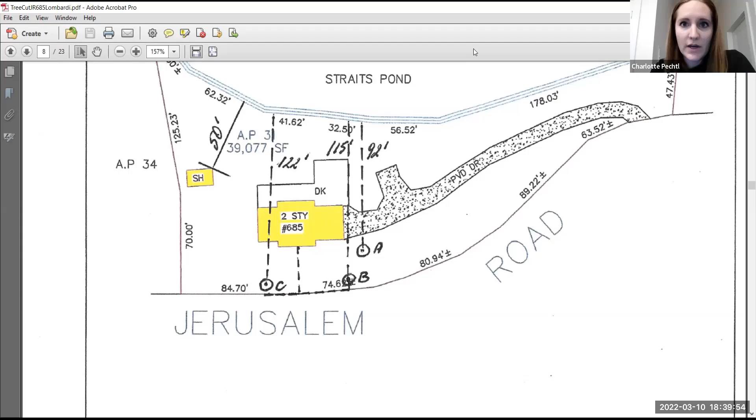I'll add that I did talk to Fabrizio about submitting this RDA because when I was called to the site for fallen tree reports, we talked to National Grid, and they said that normally they would just cut the branches, but since these trees were dead, they cut it down below the power line.

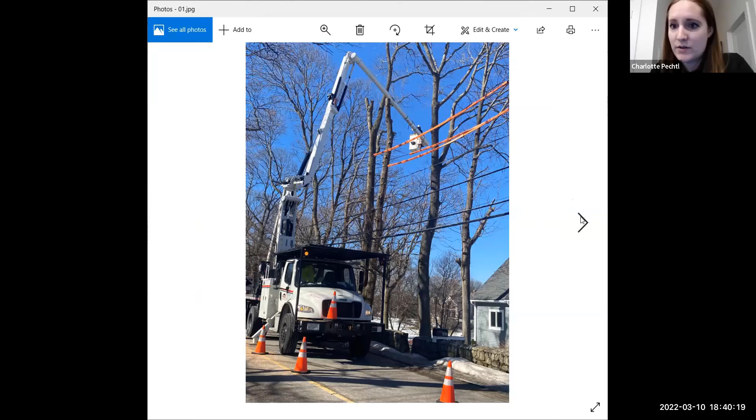Then it's the property owner's responsibility to remove the rest. This was when we were at the scene. You can see the trees have been cut below the power line, and this is B and C that were shown on the plan. Over here you can see A, which is closest to the house, 92 feet away, with close proximity to the roof.

Mr. Chairman, can I make a comment? Yes, please. I've looked at this application. Two of the three trees mentioned here, one is 115 feet, the other is 122 feet - that's out of our jurisdiction. The one tree I do see here is 92 feet, that's obviously dead, and I think we should approve this application.

Thank you. Any other comments? Am I allowed to second Jay's motion?

Jay Pamparo will make a motion to issue a negative two determination on the RDA at 685... Jay, can I ask you to hold on one second? So Alex Berg from 45 Windy Hill, I don't know - that's an application in front of us later this evening. No, I'm just making sure that Nikki, who put that in the chat box, wasn't looking at anything on this application. That's fine, sorry Jay, go ahead.

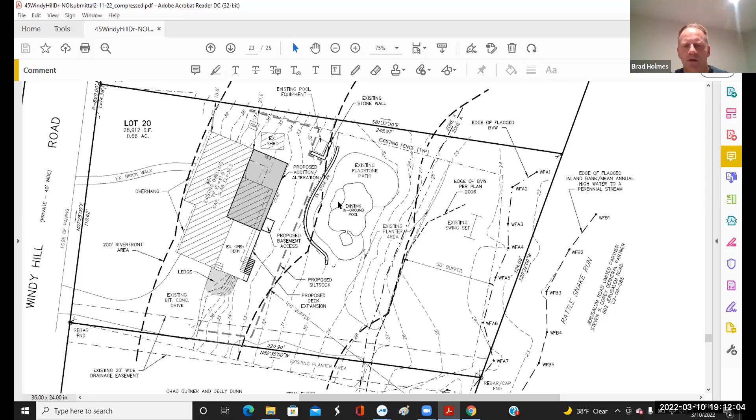In order to comply with the riverfront regulations and also enhance the buffer zone and bordering vegetative wetland, we're proposing mitigation plantings within the eastern portion of the site. And pull that up on the next image.

So that would be the yellow portion of the project is the new footprint proposed at the rear of the house, and the shaded area here towards the wetland and in the buffer zone is the mitigation and enhancement proposal to add native saplings and shrubs within the rear portion of the site.

We've crafted the project to comply with the buffer zone regulations from the town of Cohasset - sorry, didn't mean Hingham - so that we avoid any work within the 50-foot buffer zone, and we're also in compliance with the riverfront redevelopment standards.

We feel that this project is somewhat minimal in the sense that we're occupying an existing area of lawn and existing deck and redeveloping the site, but also enhancing the site greatly with the overage of enhancement plantings within that eastern portion of the site that abuts Rattle Snake Run. So I think I'll take any questions you may have and leave that introduction as is.

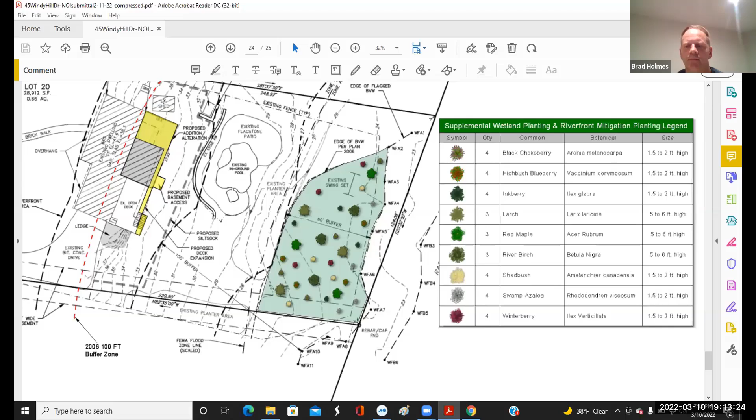Charlotte, have you been out to the site? I have, yes. Could you pull up some photographs? Brad, could you tell us the condition of that 50-foot buffer right now? Sure. I did want to say that I got a chance to coordinate with Charlotte back and forth, and I appreciate Charlotte's help. I wanted to thank Charlotte for a great job.

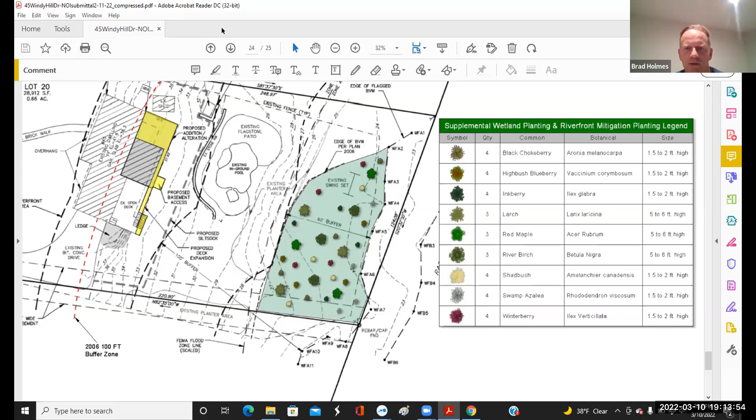Thanks, Brad. Can I share my screen for a sec? Yes. Would you like me to just stop sharing? Yes, please. Can I ask a couple of quick questions in the meantime here, Mr. Holmes?

Correct me if I'm wrong, but the only work that's being done in the 50-foot buffer is the mitigation planting. Is that correct? That's correct. And then is there any work actually being proposed in the 100-foot buffer zone? The 100-foot buffer zone would be the proposed addition, depending on what the wetland determination would be.

It did just look like the edge of it was out of the 100 on the last plan - it looked like everything was out of the 100. Correct. So my next question was, is there no work in the 50, no structural work in the 100? You're really just focusing this on the 200-foot riverfront area? Correct. And in compliance with the riverfront regulations, also adding to this area with supplemental plantings native to increase the buffer zone and wetland in this area.

Okay, perfect. Thank you. Brad, could you tell us what's under the snow right here? That's basically somewhat of a mulch and herbaceous layer. It's not a lawn area per se, but it's more of a wood-chipped, low growing herbaceous area. You can see some of the ground cover kind of popping up through the snow. There's a mix of existing native plantings and landscape plantings in that area, and what we're proposing to do is add to that. Okay.

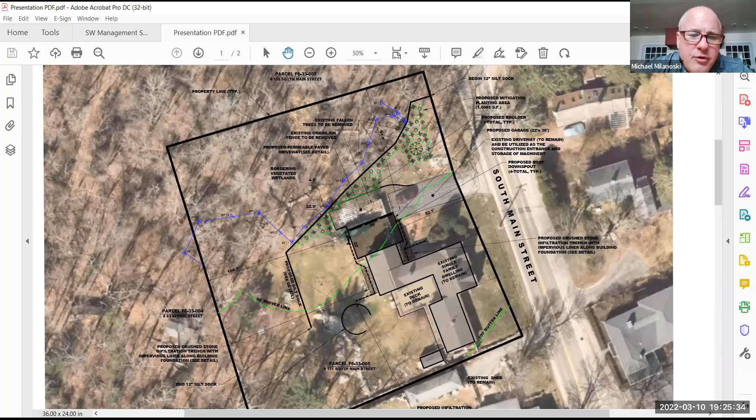David, can you go to the other aerial where it shows where the boats are all located, or zoom in there? That's hard to see, isn't it? In the NOI you actually have some better pictures that show the area where the proposed driveway extension will be, and what the outside storage currently is for the boats, which will no longer be possible with this addition should the commission choose to approve it.

Again, what we're asking for is the Concom to approve us locating this addition. It will be within 50 feet of the BVW, so it will require a variance.

As part of the due diligence with this, I did have a pre-consultation meeting with Charlotte, actually met several times. I originally came to her, which is shown in your NOI on the last page, with the initial proposal, which was to build a 36 by 36 square foot building that would have utilized the existing driveway and allowed 2 cars to pull straight in, so I would have 4 cars parked within the building. The challenge with that is, as with this whole project, that was, I believe, within 8 feet of the BVW - obviously well within the 50 feet.

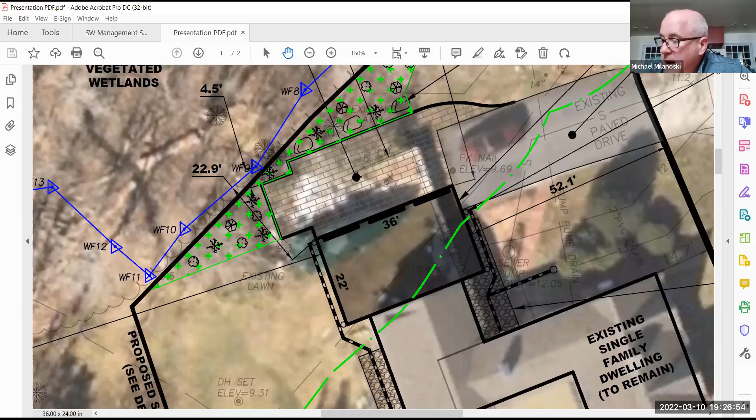Through conversations with Charlotte, we went back and tried to rotate the building and make it a little bit smaller, which you have here. In order to do that, instead of the cars entering directly in the driveway straight into the garage, they would have to go on this driveway extension and then turn into the garage, which then extends the pervious driveway that we're proposing. Again, that was part of the pre-consulting work that we did with Charlotte - she was very helpful with that. This is a smaller building than what was originally proposed.

I think after looking at this design and working it out with the 36 by 22 option, we can actually work either way, whether we use a smaller building and rotate back to avoid some of this additional driveway extension so it goes right into the garage, or this version.

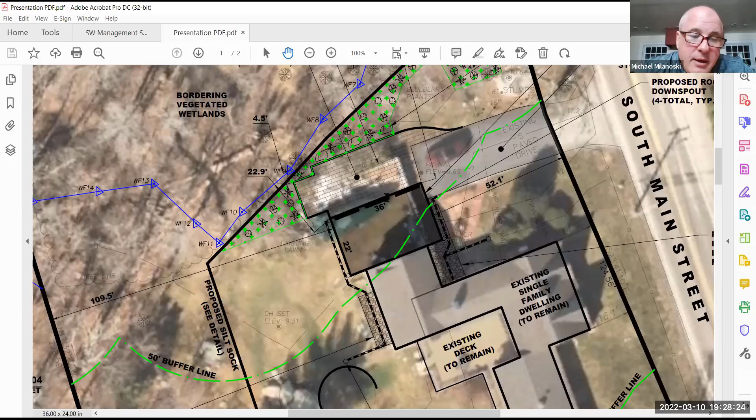I'm really open either way, whichever the Conservation Commission wants to go. So with that, I'll turn it over to David Newhall of Crocker Design Group. He'll go over the technical part and the extensive mitigation we've proposed, as discussed in our pre-consultation meeting, because this will require a variance should the commission approve this. We've provided for some extensive additional mitigation.

Thanks, Michael. I think you did a good job covering the existing conditions, the more technical side of it. For construction access, we're going to use the existing paved driveway to come in. Any stored machinery overnight would be stored either in the driveway or outside the 50-foot buffer.

Down gradient from all the proposed permeable paver driveway and garage addition will have a continuous silt sock to prevent any erosion from going into the existing bordering vegetated wetlands.

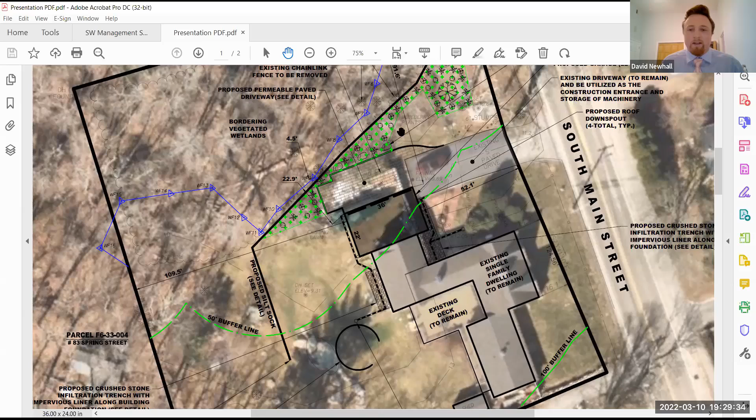The proposed mitigation plantings are all from the approved planting list within your bylaw. These are planted at a 2-to-1 ratio from the proposed garage, which is 792 square feet, and we have 1,600 square feet of plantings that extend to really help bolster this buffer area up along South Main Street where this wetland extends.

We also have a permeable paver driveway that will infiltrate all stormwater runoff that goes onto this driveway, and 2 stone infiltration trenches that will take all the roof runoff and infiltrate it into the ground. So both the peak runoff rate and the total volume going toward the wetland today in this area will be reduced.

All stockpiled materials will be held outside the 50-foot buffer with a continuous silt sock around to, again, prevent any erosion or sediment from running off into the bordering vegetated wetland. With that, I'd like to open it up to any questions you might have.

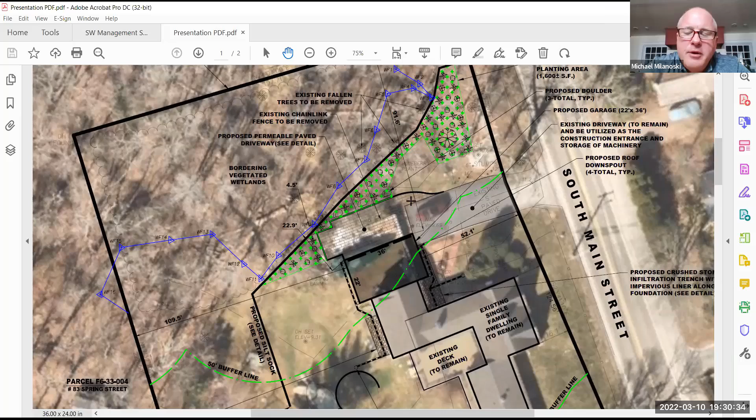David, could you show the original we came in with and the alternative, just to put everything in perspective, what we started with and where we ended up. As I said before, I'm comfortable rotating this back if that's the direction the commission would like to go, given some of the driveway issues we had to address to make the turning radius to get into the garage in that location.

Just give me one second as I pull that up. There we go. This is the alternative addition that Michael was talking about, showing the 36 by 36 garage.

What I've found in relooking at this is that the 36 depth could be reduced. You still need the width to fit 3 cars in, but the depth could be reduced, which could push this maybe 18 to 20 feet away from the BVW versus the 10.7 feet that was there. I only bring that up to show we're flexible on which way to go.

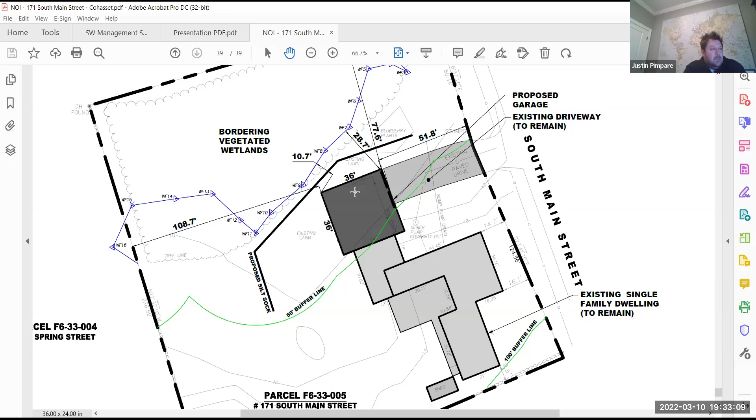My question is, first off, Mr. Milanoski, sorry to hear about the health problems within your family. So the plan we're looking at now, this 36 by 36, which plan are we working off? There was a much smaller plan there, the 36 by 22. I just want to know which plan is the revision, which plan are we working off of? The one in the NOI, this one.

Okay, can we just—and again, I apologize, not trying to confuse anybody. I was just trying to show that we can rotate that addition either way with a smaller piece, not the 36 by 36.

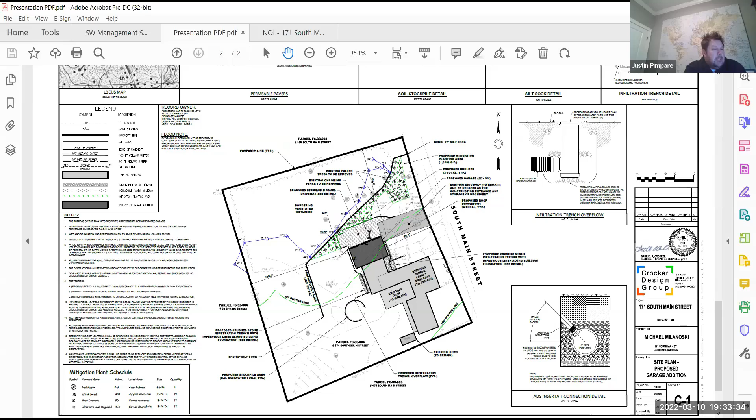I think you realize the big obstacle you have here is working in the 50-foot buffer zone, which has traditionally been considered a no-disturbance zone. I don't want to design the project for you, but it looks like the garage is 52 feet from the edge of the road, so it's further back than that from the road itself. Has there been any consideration to moving the garage closer to the road, which would take a good portion of it out of the 50-foot buffer zone?

If it moved closer, I think then I'd lose the ability of connecting it to the house, and how you would be able to go from one section to the other. In order to get into the garage, the door is in the middle of the existing house, so it would have to connect at that particular point.

To your point, could it be rotated 90 degrees and set so the back of it is over to that side I was just mentioning? Right to the left a little bit. We could probably have the back right there and then go forward, which at that point could get you about a 20-foot distance from the BVW.

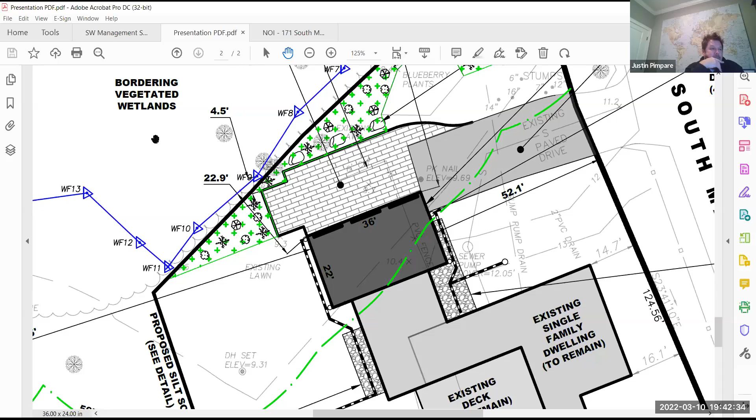The question I had is, are there any trees being removed as a result of this? I see some stumps at the edge of the driveway, but are any trees removed for the addition or the pavers? We do have some trees that have been knocked down, at 45 and 50-degree angles shown out there, but nothing of any size. There are some arborvitaes right where some of the pavers would go, but nothing beyond that.

So those 3 trees proposed to be removed, are those in the 50-foot buffer? Those are actually in the BVW. Charlotte, do you have a picture of those? I do, yes. I can share my screen if you want to stop sharing for a second. Okay, thank you.

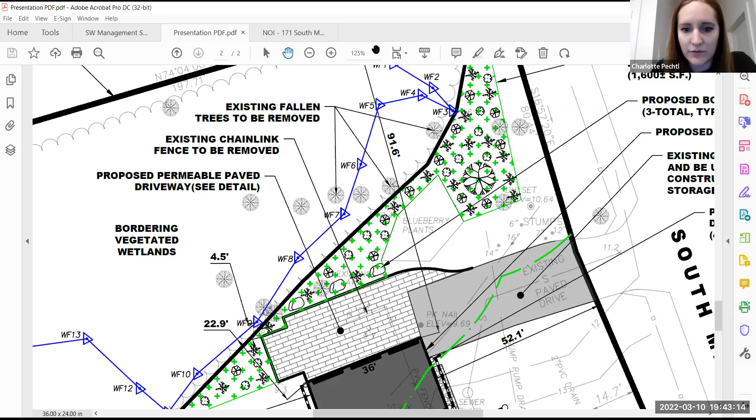Yeah, these are all widowmakers. Sorry, give me one second. They got knocked over - I want to say whenever we had that big storm, they got knocked over. I guess that was early November.

So is there any reason they need to be removed? Could you leave them there? I'm not comfortable with that - habitat, I mean, they're pretty, but when that falls, that's just dangerous. I'd probably ask you, Mr. Milanoski, if you take it down, just to leave it there, not move it, and not use it for firewood. That's fine, let it rot. Good for the wildlife. Yeah, I have no problem with that. That's what I was getting at. Thank you, Eric. You're welcome.

Charlotte, do you have some other pictures you can show us of the site? I know you took about 30 of them out there. I do, yes, sorry, let me zoom out here. I'm going to go back to the beginning. So this is the existing driveway - it has a gate at the edge of where the impervious ends. Then this is the side of the house with the entrance, and this bump out here is where the proposed addition would go.

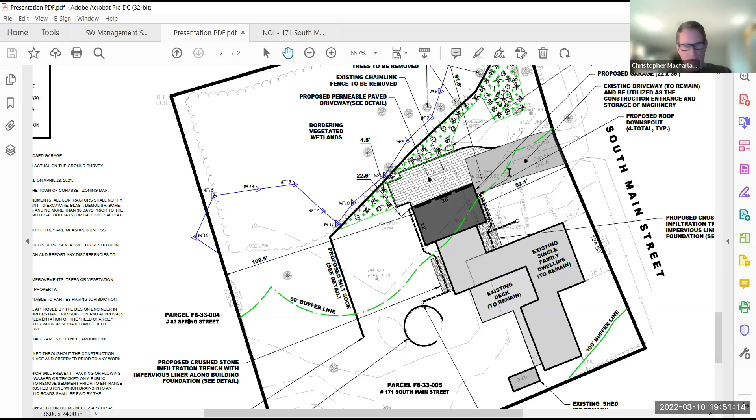The next hearing this evening is continued from February 24th. It is NOI 22-07 and Stormwater Permit 22-03 at 205 Atlantic Avenue for new construction.

Good evening, this is Andrew Flynn, the property owner. I just want to say thank you very much to all the commissioners for your time a couple weeks ago, and thank you to the commissioners for participating in the site visit last Friday. Thanks to Charlotte and certain commissioners who followed up with the Wilkinson design team, our ecological design team on the project. Pleased to have on the meeting tonight the team from Wilkinson Ecological Design, Gregory Lombardi Landscape Design, as well as our architect, and Deb Keller from Merrill Engineering. Thank you for the time a couple weeks ago and over the past couple weeks, and we're pleased to be here this evening to continue the discussion.

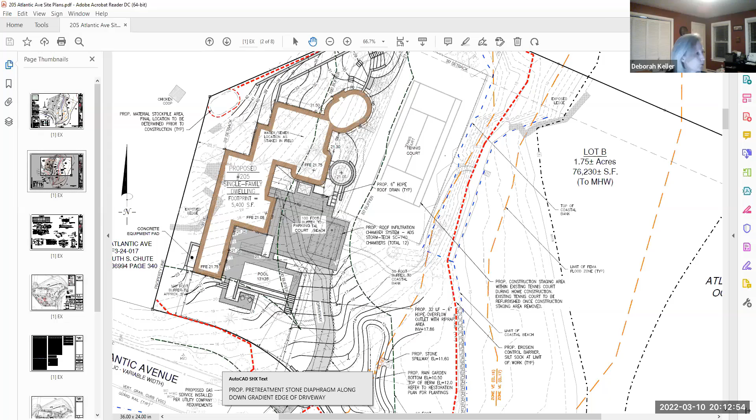Is that rain garden being built on fill, or has it been elevated? So it's actually slightly excavated into grade, with a small fill just to create that low berm on the backside. Have you done a test pit there, or any test pits in that area?

Unfortunately, the weather hasn't allowed us to yet, but we are scheduling that to get some confirmation test pits out on site.

So I recall when we were walking on the beach that we saw areas of exposed bedrock, not very far from there, and it led me to wonder how much soil cover there actually is. It's not actually even soil, it's sediment, and it's fairly coarse. So anything that goes into that rain garden, unless it's properly constructed with some fabric and an appropriate fill material with a good load of carbon material for decomposition, you may have a problem there.

So I'd sure like to see a test pit done. Probably two of them, one at that southern lobe and one at the northern lobe, to get some notion of what that subsurface looks like.

And I know you're supposed to be 2 feet above groundwater, but if in fact you are only 2 feet above bedrock, that's another story altogether, because then there's no place for it to infiltrate. It's going to go right on top of that bedrock and ride the surface of that bedrock right on down to the beach. So I think you guys need to investigate that a little further.

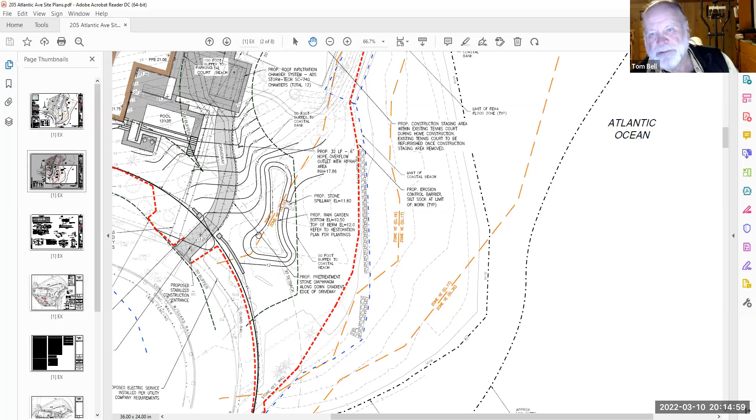You may find that you have to move that rain garden someplace else. I shouldn't say that—let's get some data first. Absolutely, and see where we're at after that.

And to Tom's comment about the test pits, that was another question I had. I certainly would like to see the test pit under the proposed infiltration chamber that's right there in the middle of the driveway. I know that clearly, we typically require test pits at the home as well.

Given that you're going to be excavating 20 feet of fill over there, I think you're going to get your money's worth of excavation out of there. But typically, we'd like to see it at the home as well.

Something that popped in my head that I wanted to mention too, that we had spoken about with regard to construction and erosion control on the site. We show sort of the lower limit in the red dashed line here. We will be adding, as mentioned at the previous hearing, an additional row of erosion control, sort of following the demarcation between the single family home work and the restoration work as we move forward.

So I wanted to let you all know that we will be adding that to the plan. I would propose that you put it right on the 50-foot buffer just outside of the tennis court area.

I'd like to see photos of when you've got your test pit excavated—photos of the profile. I'm a licensed soil evaluator as well, so I'll probably be the one that goes out there, just so you know that we're not just digging a hole and filling it in.

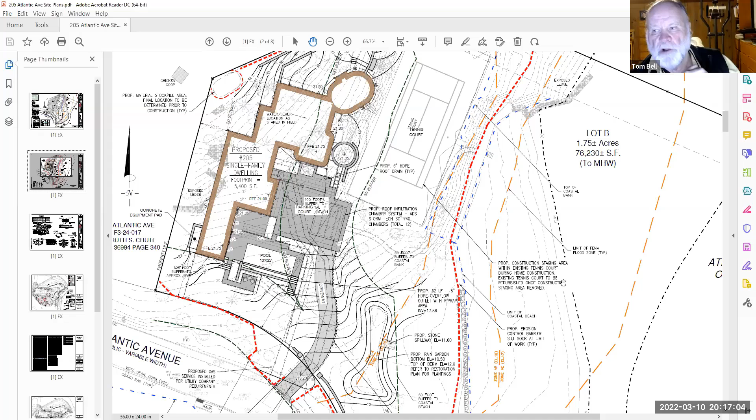And I would also hope that you would leave it open for at least 24 hours, if not 48 or 36, to get an accurate estimate of the water level and not just depend on modeling. I'd like to see how that fills up.

I will double check—that's almost a liability issue to leave it open, but I'll see what we could do there. Maybe we can cover it so that it's not a safety issue. So I think you can probably put a temporary fence around it.

A lot of excavators won't do that. Put some plywood over it, or a steel plate, something else. So I'll check into that to see if we can do something to that effect.

Has there been a plan submitted that shows the different drainage areas on this site, pre and post? I do have one in the stormwater report.

It wasn't in the actual plan set that I have attached here. Let me see if I can. But you do have one in the documents. Pre and post? Pre and post, yes. Okay, and do you know off the top of your head to explain to us?

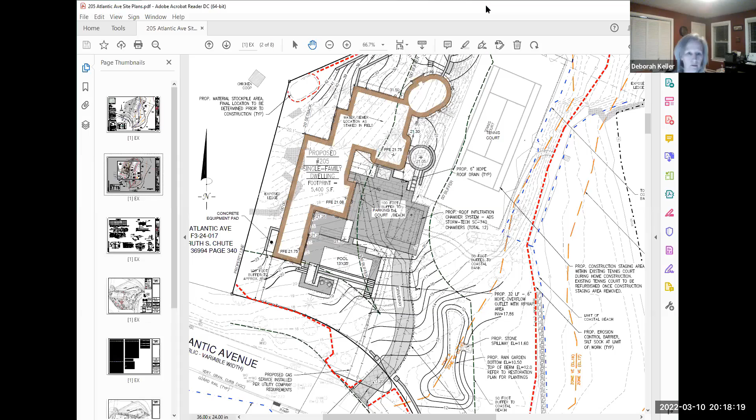Absolutely. The drainage off the, well, two areas. One is around the back side of the house and down towards the road. The other would be the actual parking court. So there is a high point just to the right, and we added some topo on the watershed plan so that we could break it out properly.

A high point right about here splits the two watersheds. So you come right through the slope here - I'm guessing a little bit. We have a little berm here, as to what flows towards Atlantic. It kind of breaks off again over here, as this does flow down to Atlantic Ocean, and sorry, Atlantic Ave is what I meant to say earlier.

So you have just this small wedge here that ends up flowing towards the street. Everything else flows towards the ocean itself.

And again, it does, you're right, it's very steep, flows to the tennis court. The tennis court does pitch about a foot grade difference, amazingly enough - it's 21 on the high side and approximately 20 on the down gradient side. So it does slope across and then down into Atlantic Ocean.

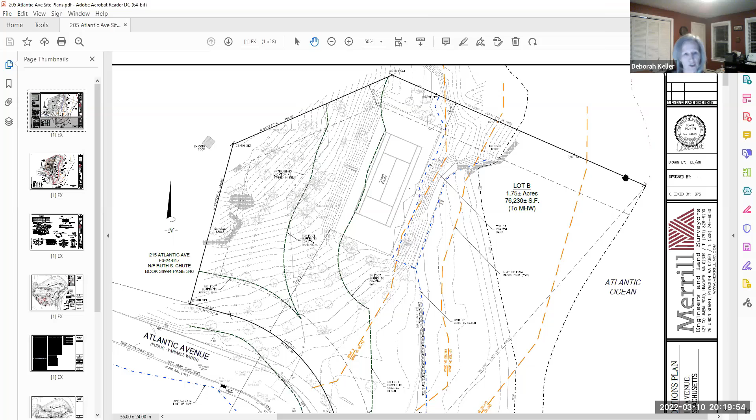So we did add some of the offsite watershed here that does come onto our site before it flows off to discharge off property. So that was the existing.

And then for proposed, we're maintaining the same high point, but it will come across and break with basically this corner of the house, where this side does pitch and slope around and over the tennis court and down the side here. And this side does run from grade - we have some spot shots where this is high and it slopes across here, dropping down. This is, I think, the deepest excavation area here as you move along, and it will wrap around. This is the area that does flow onto Atlantic Ave.

So what we have done is the Atlantic Ave discharge point does meet both peak rate and volume. So we're reduced in proposed conditions from existing conditions, where, as we were previously speaking, the increase in the peak rate and volume that we saw in a few storm events were the discharge towards Atlantic Ave only.

So with that being said, we are capturing the entire roof system into the subsurface chamber underneath the auto court, our driveway here, with an emergency overflow, so that we located this so that any discharge from that system would flow and make it into the rain garden, rather than just sending it off and discharging it directly to the beach.

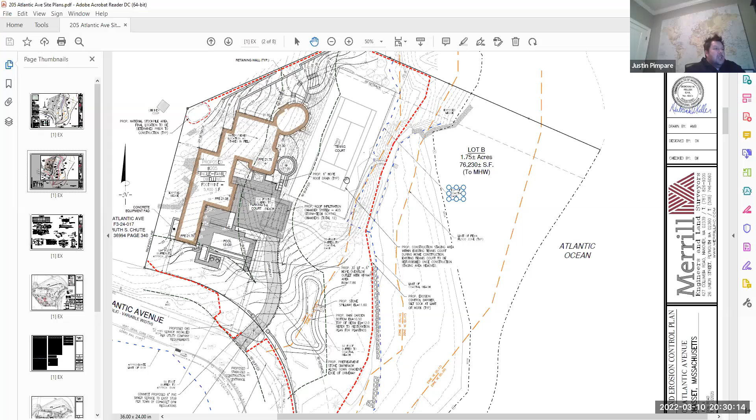One question I have on the north-facing side of the house is the proposed stockpile area. If you move down more to the left - yep, right there. It seems to be the high point of the entire site. I know it says final location to be determined prior to construction, but I don't know how you're going to stockpile any material there, because you're going to be cutting out that whole area. So to my point earlier about where the stockpiling is going to be, it'd be great if that was on the map as well.

In addition to that, it would be great to outline a concrete truck washout area, because clearly the trucks are going to need a washout area, and we want to try and keep that washout on site as much as possible.

Okay, so I envisioned this stockpile - I apologize, it says stockpile - I don't see it as a soil stockpile area. I looked at it more for materials, maybe a pipe or anything of that nature. It is raw materials, yeah.

Because Andrew was mentioning that we are working with a general contractor to get more details on a construction management phasing plan. Our initial thoughts were a lot of the material will be hauled off site, that can't be held on site. But we will be looking into opportunities of where we could maybe store stuff.

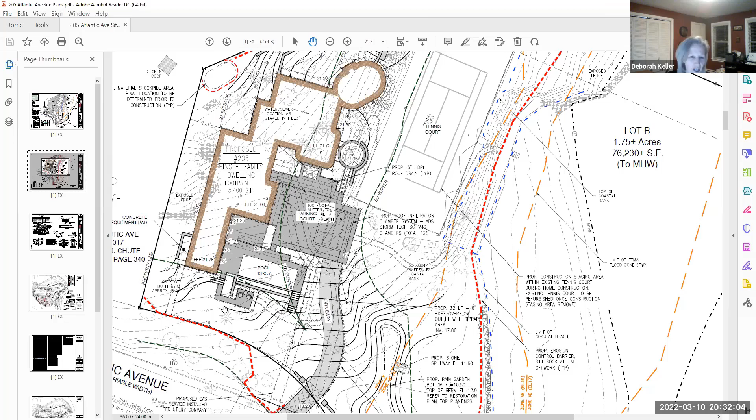Unfortunately, the other piece that's relevant here from a CMP plan, and I don't want to speak too formally about it, is the neighbor to the left - in terms of this plan, kind of to the northwest, there are access points there which are obviously completely outside the 100-foot buffer. There's ongoing discussions with those neighbors, in a friendly manner, about some reasonable access points and reasonable areas for lay down and staging. So obviously the driveway will be the main point of access and the main artery in and out of the site, and that'll be outside of the 50. There will likely be some ancillary staging areas that will be, not on this plan that we're looking at today, but more from a neighbor relations dynamic to the north and the west.

Yeah, I think you're going to need that as well. Right, and obviously it's all out of the 100-foot buffer. So it's out of our jurisdiction.

Sounds like a great opportunity, Andrew.

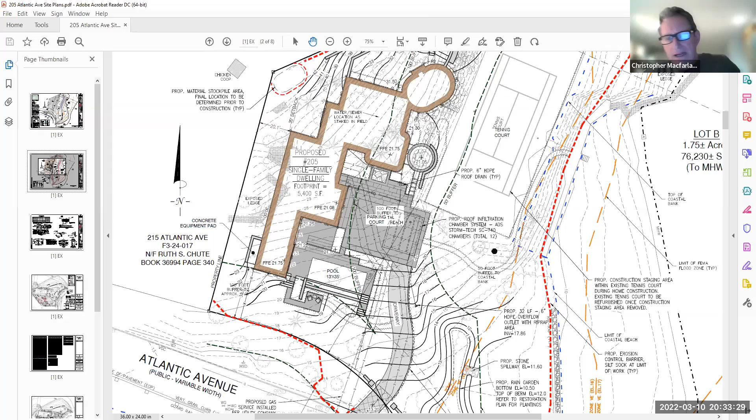So I'd like to add two comments. Well, I guess we're still outside the 50-foot buffer, but I'm going to move us into the 50-foot buffer. If we don't discuss the removal of invasive species and remediation planting, then there is no reason for being in the 50-foot buffer. So I would ask you to look at your rain garden and your contouring and see if you can't tighten that up, and actually consider leaving the 50-foot buffer as a no disturb zone, which is what our bylaws call for it to be.

I think that many of these contours could very easily get pulled back, tightened up. You say you're thinking about adjusting the rain garden anyway, so I'd suggest looking at that a little more closely and tightening it up, and that's on both ends. I think it's quite possible.

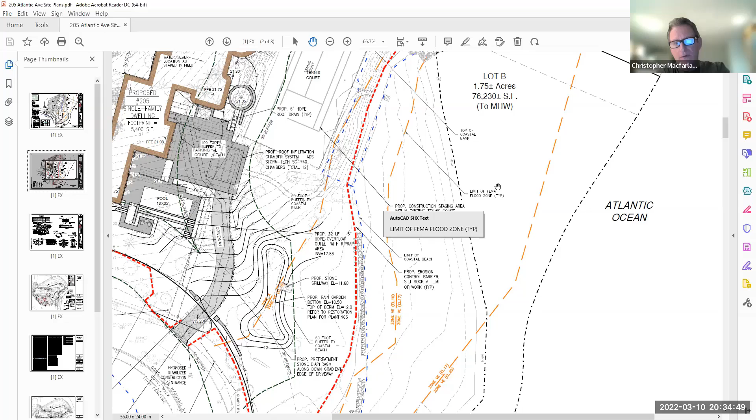I also think that the removal of trees is something we don't want to see in the 50-foot buffer as well. So I'd recommend that trees are not just taken down because of a desire to either move earth or because a certain tree doesn't want to be there. I think it's probably wise to get an arborist report. It looked like you had staked those trees, or someone had marked those trees - an arborist had marked those trees - but I'm not sure it's been explained convincingly that specific trees should be removed for specific reasons. Maybe that's something we can go into at the next meeting, if in fact someone's actually analyzed all those.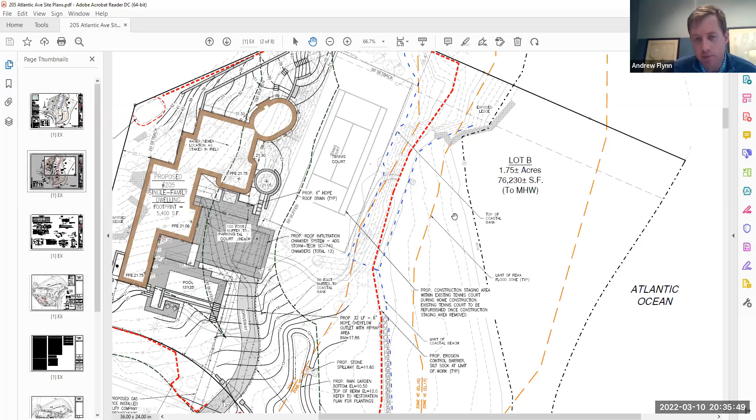Sure, I can touch on that briefly and we can get into it in more detail next meeting. We've inventoried all of the trees with an arborist. At the moment, there are only 4 trees within the 50-foot buffer being removed that aren't either dead or Norway maples. I believe, and Troy from Lombardi can correct me, we're replacing 8 or 9 trees back in the 50-foot buffer.

Yes, there are actually 8 trees in the 50-foot buffer. And to Andrew's point, the submitted plans and the following plan are a list developed by Bartlett Tree Experts. We had them tag, identify, and grade the trees you see on site that are above the caliper inches in your purview. This list on screen makes up all those tagged trees.

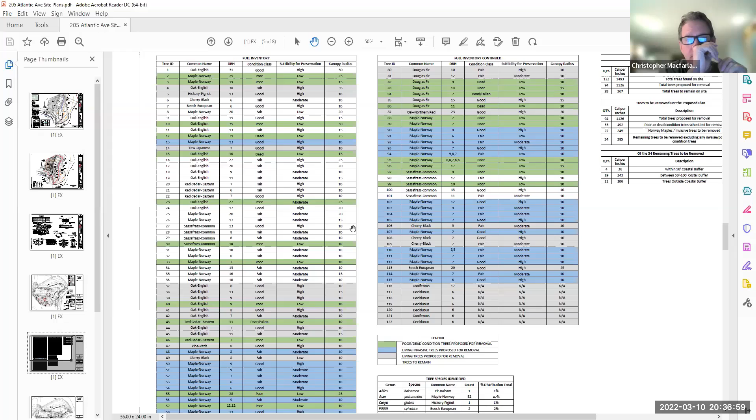Okay, we'll have to spend more time with this, I think. Again, the health of a tree—there's nowhere in our bylaws that suggests that because the health of a tree is compromised in the 50-foot buffer it needs to be removed. Obviously if there's a safety concern, we'll look at that too. But we should take a closer look at these.

Yeah, I believe in Massachusetts there's a requirement that if a certified arborist deems a tree greater than 50% dead, it becomes a potential liability and falls onto the homeowner's responsibility to manage. I don't know how that's superseded by trees inside a buffer zone, but I know we are part of those conversations quite often with a lot of our projects.

So I just want to chime in here on the chairman's points about removal of invasive or healthy trees in the buffer zone. I have to be honest, I have a hard time supporting this restoration project for the work done within the 50-foot buffer zone.

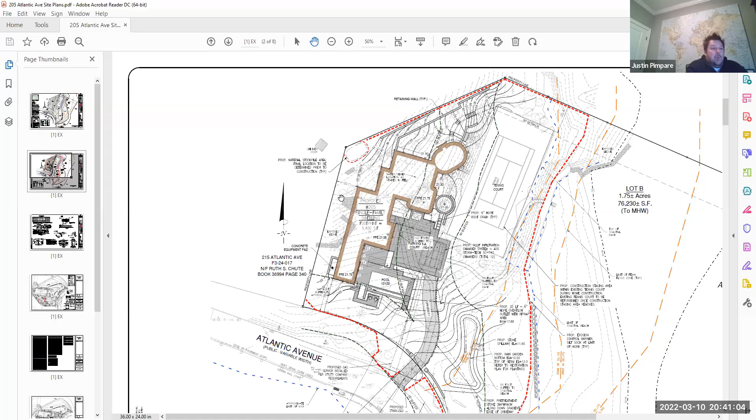Also, section 39 of our bylaws doesn't allow herbicide or pesticide application, and that's specifically stated in section 39. So I just have a really hard time supporting the restoration project, and I wanted to throw that out there.

Sure, Jay, I appreciate the perspective, and we've endeavored to be thoughtful. I think in our last meeting we talked about approaching this site as a mosaic, where certain things get improved in certain areas, certain things are left undisturbed in other areas. It seemed there was some support for replenishing with native species areas where this incredibly invasive knotweed and other elements are. I understand that invasive and knotweed don't live in the bylaws, so I think we're very open to a discussion on it.

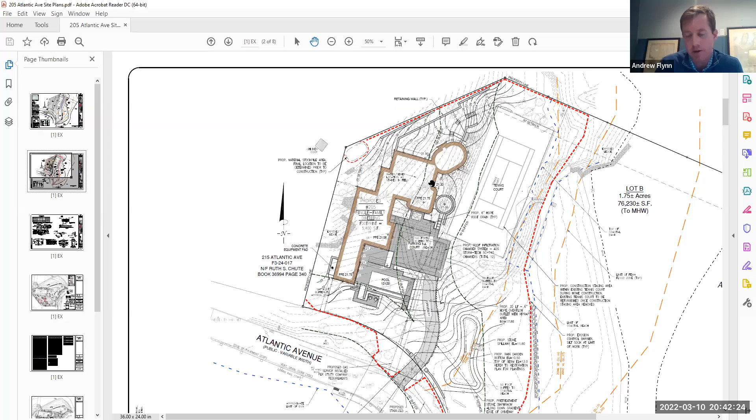I'd hope that there's a balance we could find, or at least explore. I think the knotweed is incredibly thick and incredibly resilient, and it will likely expand at some point. The team we brought in from Wilkinson, they're renowned folks, they've done a lot of really interesting projects, and they often leave these areas better than they found them. I realize we're not going to solve it all tonight, but I'd ask for a degree of open-mindedness on it.

But I hear you loud and clear that less disturbance or no disturbance within the buffer zone is the goal. I know, as we've seen in other projects, folks put structures and other things inside the 50, and of course we're not suggesting any of that here. I know how hard Seth at Wilkinson and the Lombardi team have worked to be thoughtful about this, and I just ask that we keep that discussion open, but I hear you loud and clear in terms of your perspective on it.

Yeah, no, and I appreciate that. I'm only one vote, I'll continue to have an open mind, and we're not going to vote on this project tonight, there's too much going on. I would prefer to see less disturbance or very minimal disturbance. If I were to entertain any work in the 50 for removal of vegetation, it certainly wouldn't be any healthy trees, regardless of whether it was invasive or Norway maples. It wouldn't really matter to me.

I know we're all trying to make it look beautiful, we've all come around that corner and seen that site over and over. As I understand, in order to do this project it looks like there would be upwards of 12 to 18, potentially up to 2 feet of fill being cut out, because let's face it, it's a rocky area. You're not just going to pull the invasives out and plant something there. That whole area in the 50 is going to have to be filled in. So I'll continue to keep an open mind, I'm only one vote, but I have a tough time with the extensiveness of this upfront restoration project.

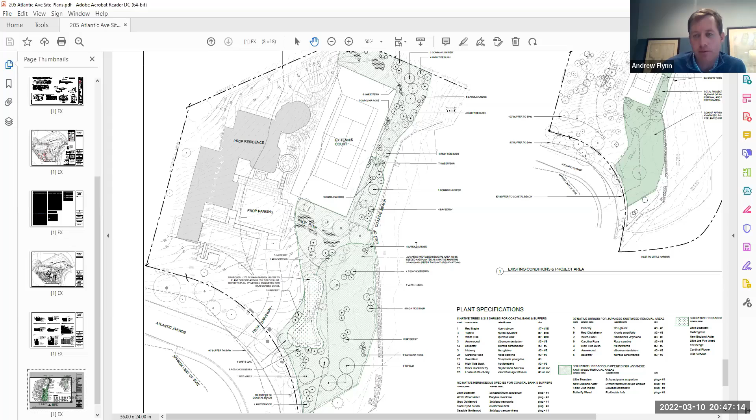Andrew, I'm going to ask you to do the same thing you've asked of us, which is to keep an open mind. I think your team from Wilkinson would tell you that piece of 50-foot buffer could be reclaimed the same way as the area of knotweed. So in your exploration, I'm going to ask that you keep an open mind and consider that as well. Okay, Mr. Chairman, yes, that's very fair, and we'll keep that in mind, take it away and reflect further, do a bit more research as well, and come back and report back. And then one more question about the tennis court.

Is that area included in the stormwater area of disturbance? I was wondering, because I think it was like 39,000 square feet that was included in the area to be disturbed. I was wondering if that area is included. It was not, because it's existing conditions. So I believe the 3,900 would be the proposed increase in impervious surface, if I recall the numbers correctly.

But we did include it in the stormwater calculations as an impervious surface. Okay. Mr. Flynn, I would say that I'm sure at one point it was a very beautiful tennis court. It's a very large tennis court. And looking at the size of the court and the slope off to the beach area, it's a fairly substantial slope.

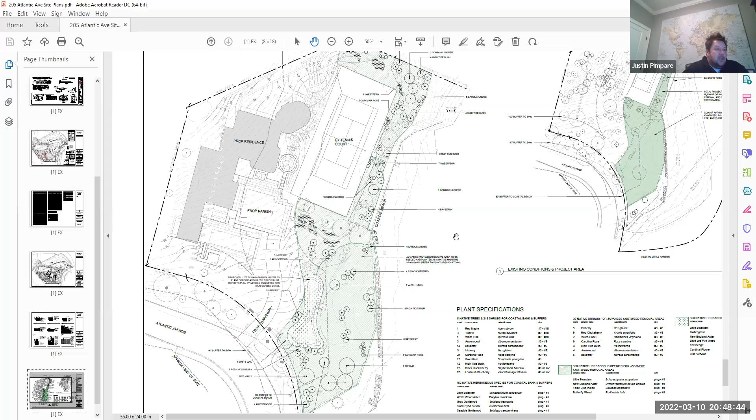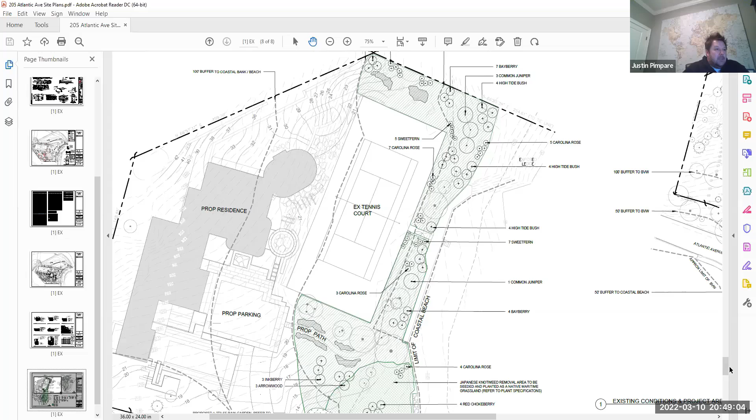One might want to consider pulling the court back a foot or two and allowing for some, I know there's already a slope there. It seemed like I didn't see the slope, but on the map there's a slope, and allowing for the retention of some water to not go over the bank. I actually don't know how you're going to construct that and cut that all out and repave it without stabilizing that bank anyway, because it's a clear drop off at the edge of the pavement there. So one thing to consider is cutting that back a couple of feet and still having a very large size tennis court.

I wonder how many times that tennis court's been flooded, Jay. All right, because if you were putting in a clay court, you'd probably find there wasn't much clay there after a nor'easter, I would think.

But Mr. Flynn, let me just say one thing, and you need to keep an open mind on this question of invasives, because the fact is, in my 5 years, we have never approved the use of a herbicide. Zero. These are the facts, and you have to keep those in mind when you look for your technical solutions. And this is the kind of baggage that we bring to this decision-making process. All right.

Absolutely, Mr. Eisenhower, and I appreciate it. I think your suggestions earlier, I'll take those away with Wilkinson. I know they spoke to their own experience and perspective, and we can review some of the other methods as well and bring it back to the table.

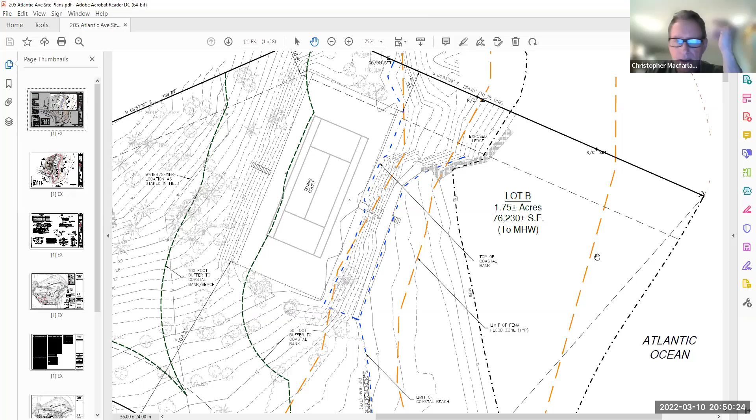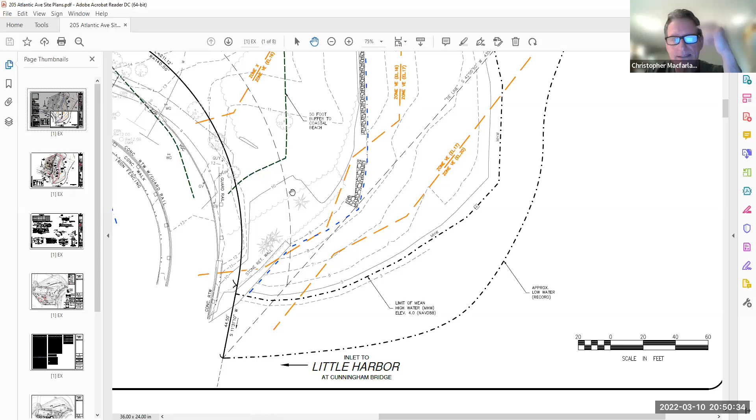Has any... I know that Tom Bell brought up the point of the blue mussel habitat immediately. I can't say it's on your property, it might be on your property. I'm not sure where the line exists, but has any habitat study been done on the property, kind of in total?

I can't say a full habitat study has been done. We had the arborist there. Obviously, Wilson has done their full inventory. So I think we have a lot of the component parts.

Well, I would recommend that it not hold us up at a later date, that you'd want someone to take a look, whether it's nesting shorebirds, the mussels, the salamanders, or whatever. Yeah, as well as the ground animals that are in that area. So I think that's important.

Jay, I know you've been through this before with other projects. I don't know what the extent of it is, other than maybe the need to identify any critical habitat. I'm not sure. Maybe a look at what the impact on habitats would be as well. And that would be within the 50.

Well, I think our purview extends to the 100-foot. Typically, the area between the 50 and the 100-foot only comes into play if, in fact, it's creating an impact on either the inner buffer, the 50-foot buffer, or the resource area itself. But part of that is wildlife habitat in that area.

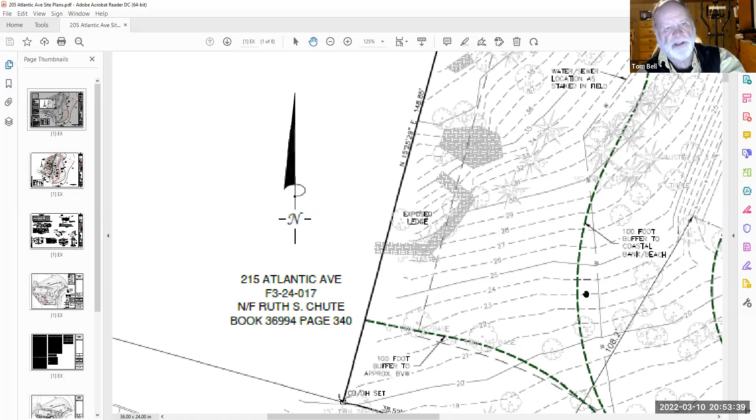Yeah, I'm looking at the assessor's boundaries of the lot, and they don't actually extend to the middle of the channel like I thought. No, it's mean high water line.

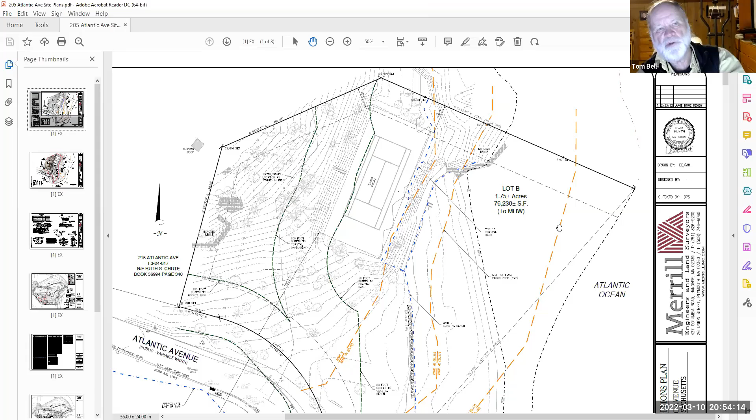But that doesn't mean that we can ignore any impact to wildlife here, and it probably is advisable to have a wildlife study here. It is a very sensitive area. I'm not a marine biologist, but I do have some familiarity with what they do, and it just seems to me that a wildlife study would be a good idea, so that we don't get down the road and find there is an impact. That would be a real tragedy if this resource was adversely impacted.

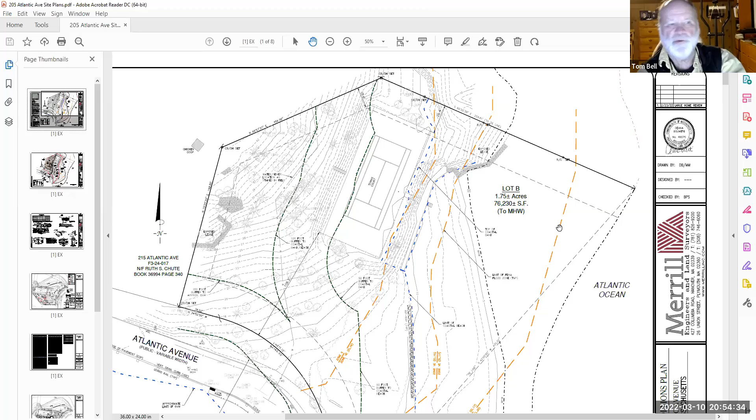And DMF, their shellfish division, they do sample here. They're well aware of this place, very familiar with it. They've been sampling it for decades. I don't know that you need to contact them—there's probably no regulatory requirement that you do—but perhaps a practicing professional wildlife biologist who is familiar with shellfish should have a look at it.

I think we can consider that, and we'd like to follow up maybe with Charlotte to understand the scope of that a bit better. Is that a customary request, or are there some precedents that could maybe be shared with us?

Well, we do have jurisdiction to require wildlife studies, and I believe they do extend off the property. Understood, I just didn't know if there were recent examples that could maybe be shared with us, just for our reference.

I don't think we've ever been in a situation where we've had such a cluster of shellfish that we're aware of. In Little Harbor, I'm sure they're just as thick as they are out here—not mussels, but the clams—and they're just sort of out of sight, out of mind. But perhaps we should be looking more closely at that with other applicants requesting alterations to their property adjacent to Little Harbor and Cohasset Harbor. But this is a right-in-your-face kind of situation, and as I said, the wildlife biologist who was collecting material exclaimed that this was really almost a unique resource.

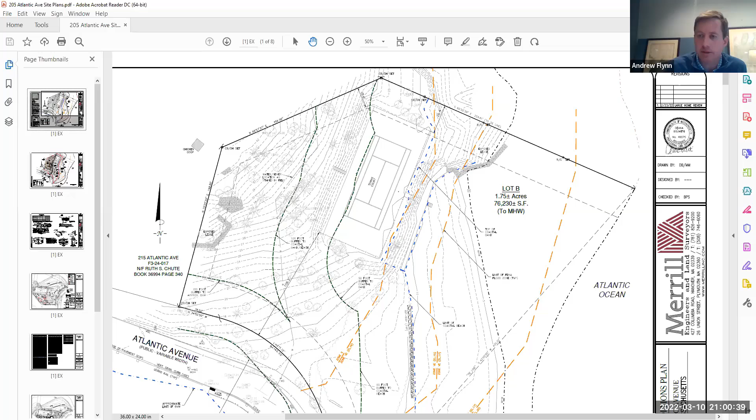Okay, our next hearing is continued from February 24th. It's NOI 22-05 and Stormwater Permit 22-02, 136 Atlantic Avenue, for a pool and pool house.

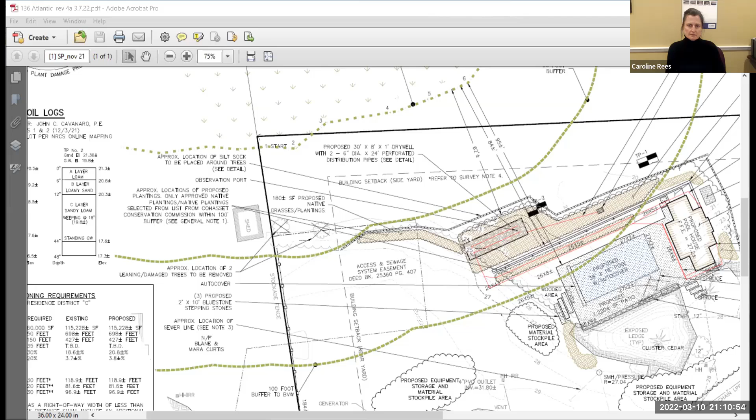So that's how I would like to proceed.

Mr. Chair, I think at the last meeting the commission was looking for further justification and documentation from the applicant with respect to the vernal pool. I think Mr. Cavanaro has accomplished that with this 4-page document. I'm convinced he's hit on all the points we asked him to. Thank you for that, John. I'm satisfied with this project moving forward, as this is a BVW with minimal work in the 50-foot buffer, other than removal of a couple of leaning or damaged trees. Outside of that, there is no work being proposed in the 50-foot buffer zone.

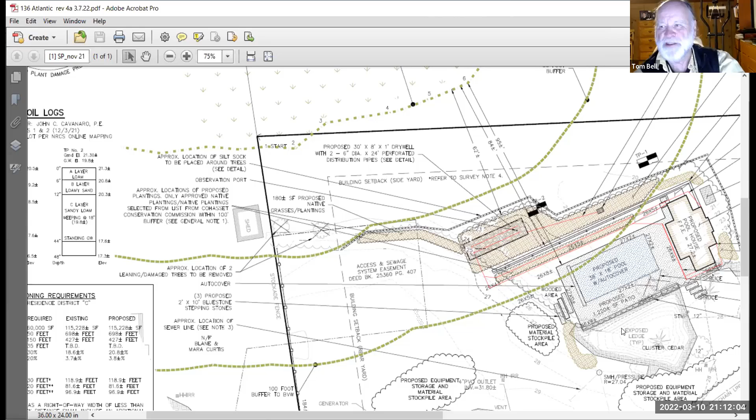I'm ready to make a motion to move this project forward if nobody has further comment. I'd just like to add that condition, Jay, if you can add it. You're so good at phrasing these. Is there any further comment? No. Myers? All right.

No, we don't have any additional comments. This is all very reasonable to us. Thank you.

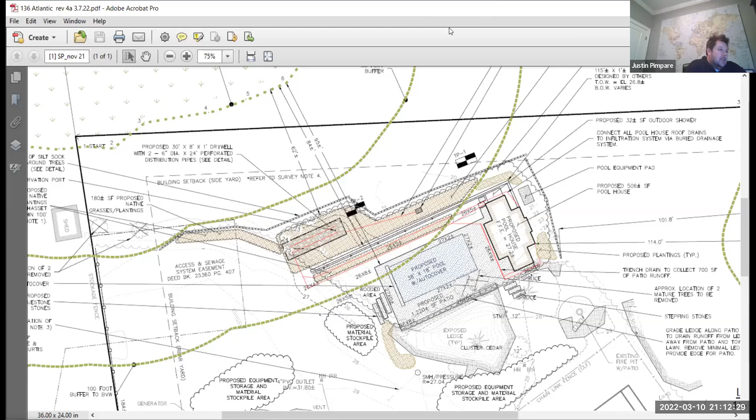I'll save the special order for the moment. Let's just go with the variance, because there are a couple of trees being removed in the 50. Justin Pimpare will make a motion to issue a variance for work within the 50 for the project at 136 Atlantic Ave. I have a second.

Second. Having a motion and a second to issue a variance for the removal of two trees within the 50-foot buffer, I'll take a roll call vote. William Ashton, aye. Tom Bell, aye. Kathy Berrigan, aye. Eric Eisenhower, aye. Trish Grady, abstain. Justin Pimpare, aye. Chris Macfarlane, aye.

That vote passes 6-0-1. Justin Pimpare, I'd like to make a motion to issue an order of conditions for the project at 136 Atlantic Avenue. Tom, if you want to make a second and add your special condition to that, I'll let you have the floor. I'll second that and add the condition that...

The property be accessible to our agent and perhaps one other person to conduct a brief investigation over the course of the next 5 weeks. John, does that sound about right for the breeding season to you? Yeah, it should. I would probably say over the next 2 months, just in case we need to extend it a little bit to catch any of the late breeders.

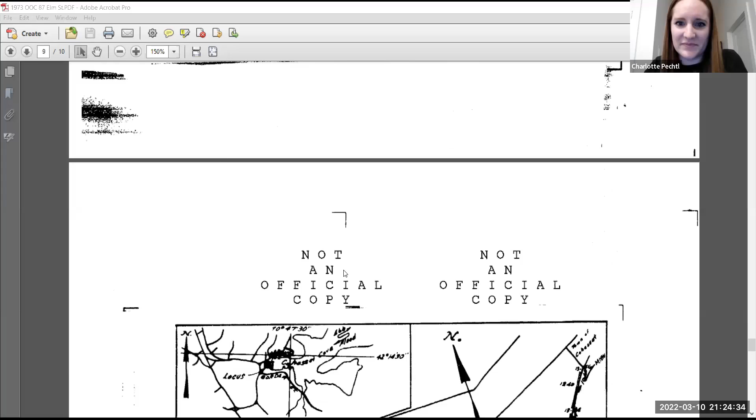Can you explain to us, since that property has changed hands within a very recent period of time, how was it that this wasn't closed out before then? I have absolutely no idea. I think it just came up in a review of the documents that were on the registry.

That is what a lot of legal representatives do for banks when you're trying to sell the property. Usually they do a land court and a registry review to see if there's any open permits, and this one was just sitting here. So I'm not sure why it wasn't closed out, but if anyone's seen the seawall along Elm Street, you can see that it is pretty much built like this diagram with the Jersey barriers and the riprap. And it doesn't look like they used any dirty looking fill with debris or rubbish or anything like that. So that was part of condition 1 in this order of conditions.

Charlotte, I'm gonna suggest that you meet with Amy on this. But the applicant is not the person asking for the certificate of compliance. Yeah, I think—how do we do that? So at least when I talked to Amy about this, really her only comment was that it has to be closed out in a public meeting, so we have to vote on it. She didn't really mention if the current applicant is requesting it.

So I'm happy to double check with her on that, but at least for evaluating the order of conditions, when I talked to Mass DEP as well, they said you pretty much just go out with what you have. So I went out with this order of conditions, and I also found the minutes from 1973, and it's a different person listed. I'm not sure who the person is, but it's definitely not the current property owner for this site. But if we need to document that in any way with closing it out, I'm happy to clarify that with legal counsel.

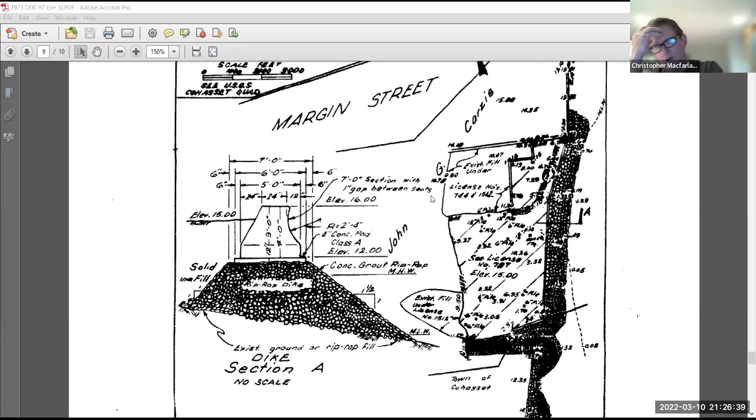Okay, so we'll take a vote tonight to issue a certificate of compliance. But legal counsel needs to approve that this can be done without the original applicant involved.

So I agree. Is this time sensitive? I believe so, yes. I don't see Ted Lubitz on the call, but when I talked to him, this was related to a time sensitive issue. I'm happy to clarify with legal how we document and write a certificate of compliance for someone who isn't here or moved out of town. Usually when we've issued certificates of compliance for other projects, it's understood that property owners may change, but we're closing it out for the property site specifically.

Also, just to clarify, this order of conditions was listed as 87 Elm Street, which as we know is now 124. So I'd want to clarify that on the certificate of compliance. But usually when closing out projects, no matter how old, it's understandable that owners switch, but you're still attached to the actual property address.

Charlotte, is there a fee for this certificate of compliance? I know in the new applications, when we redid the bylaws around 2015, the fee was paid upfront for certificates of compliance, but pre-2015, there was a fee the applicant needed to come in and pay to get the certificate of compliance.

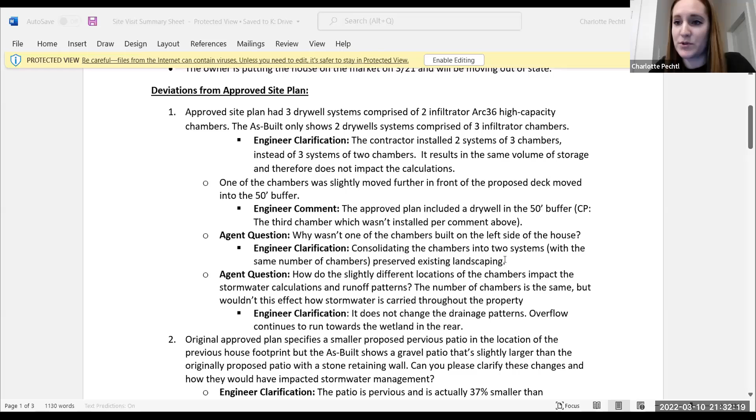It was moved slightly into the 50-foot buffer, but the engineer clarified we had previously approved this plan with 3 dry wells, one of which was already in the 50-foot buffer. I also asked about the one on the left side of the house, but they said they wanted to also preserve the landscaping, so that's why they built 2 3-chamber systems instead.

The locations don't really affect it. I did have another note about the size of the gravel patio in the back of the house, but the patio is pervious as it was originally proposed and approved. It's actually 37% smaller than permitted, and again doesn't impact stormwater.

I did ask for photos of the dry well, but those were not available, though the as-built ties were provided. I just had a few other minor clarification questions that were answered.

We did find when we went to the site that they did install 3 trees as we had originally approved. 2 were in the same location as approved, and 1 was installed on the right side of the house. So they did install 3 trees, and just to note, all of those trees are outside of the 100-foot buffer.

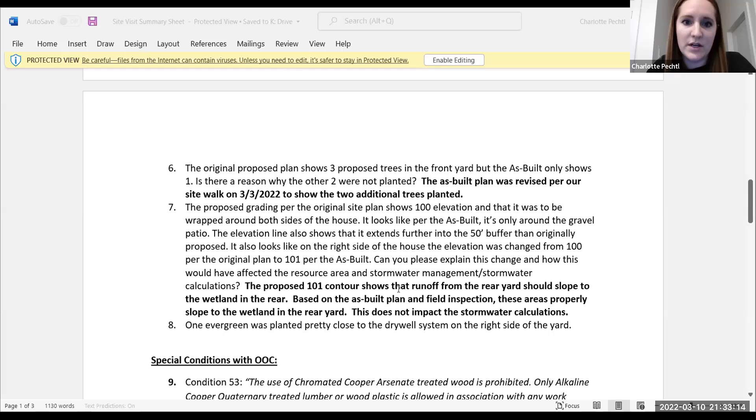I just had some slight clarifications on the proposed grading, which were clarified here. For the most part, the only special condition was that we don't use chromated copper arsenate treated wood, and the property owner did confirm that lumber was not used in the construction of the property.

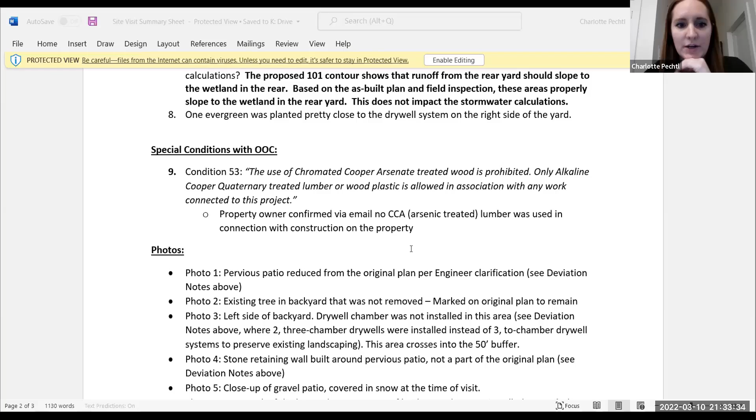I did take a bunch of photos. I'm not sure if you guys want me to go through them, but those were what I noted and what were clarified. I don't know if anyone has any other questions, but for the most part it seems like this was completed in compliance with the order of conditions.

I have one question for Jeff, if you could let him in here. Sure, I can do that.

I'll just promote Andrew, or Andy Gelson, as well, who's the property owner. Hi Jeff, can you hear us?

The fact that the chambers moved further... Chris, we can't hear you. Can you hear me now?

Yes, I can. Okay, the fact that the chambers moved into the 50-foot buffer, those properties are pretty low. I mean, is there any room between those chambers and groundwater, or are they sitting in the groundwater? This was a raze and rebuild project where they were actually decreasing the amount of impervious surface.

So naturally there was a reduction in runoff, and working with the site constraints, it's a low-lying property. The only way to get those higher would be to bring in fill to the property, which isn't what we were proposing. So it's certainly an improvement compared to what was there before.

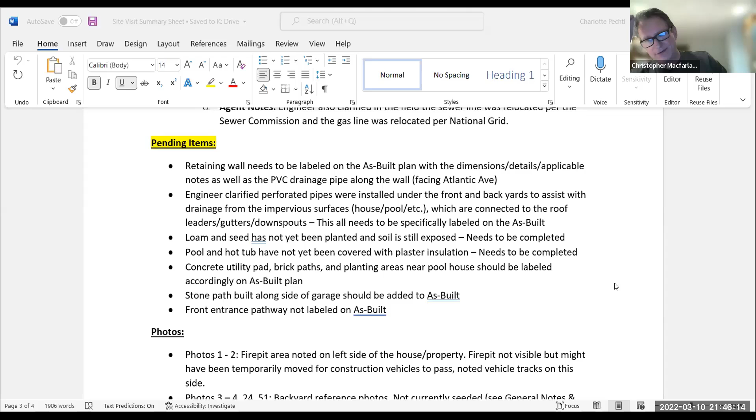Do you want me to, do we want to vote on a COC and then follow up? No, no COC. Okay, no reason to vote.

Do you think they built their retaining wall on their own property, or do we have another situation like that? The reason we are asking is because we don't think it was built on the property line, but we need to obviously look into that. But it seems like there is an assumption it might have been built past the property line.

Well, the side one is equally as concerning. Okay, all right, I'll follow up with the engineer and we'll try to get an as-built ASAP. But then do we want to request for them to get a show cause hearing once they give that to us? Yes. Okay, sounds good.

Any topics not reasonably anticipated in 48 hours? I'm violating it again, but I did go to the Harbor Committee meeting and not much happening there that affects us. There may be something in the near future. Town's talking about the potential to buy 22 Margin, which is that empty lot right across from the northwest corner of the old Cohasset Harbor Inn.

There's no structures on it, and it's in, I believe, the AE FEMA zone. Their 50-foot buffer crosses into it, maybe 6 or 8 feet, and then obviously the 100-foot buffer kind of cuts through the middle of it. So I guess there's an outstanding question about whether that lot, anything could ever be built on it, short of just maybe a crushed stone parking lot and maybe some uncovered boat sheds.